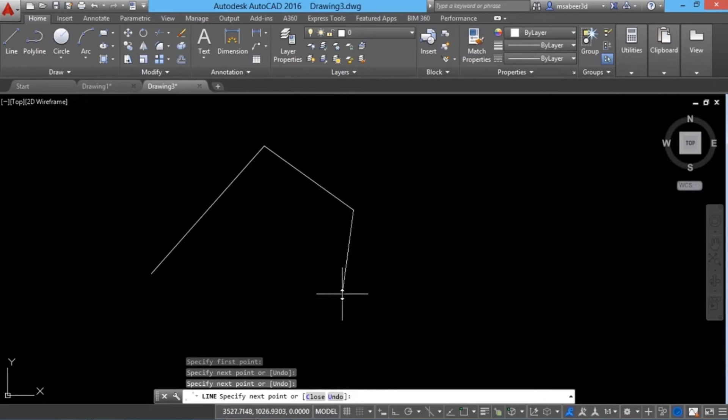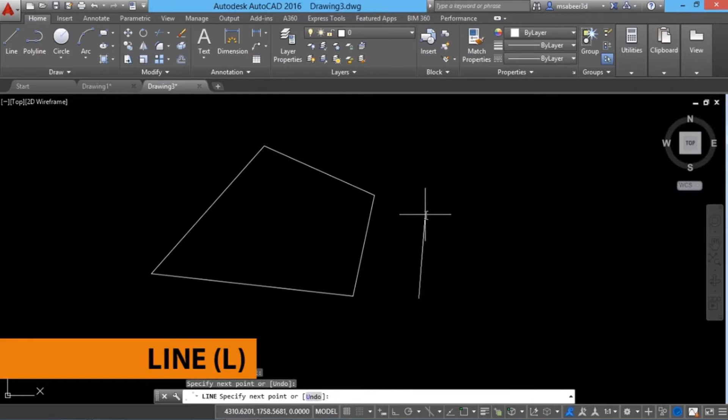These coordinate locations you can see in the status bar. Now I'll just pick some random points to define the next segments. I can undo the previous segment if I want using the undo option in the line command. Now I'll click to define a few more points, and I'll click on close to go out of the line command. Now I have got an irregular polygon. Alternatively, you can also create lines by typing the letter L using the keyboard. Now you will get the same prompt sequence. And I'll just give enter to go out of the line command.

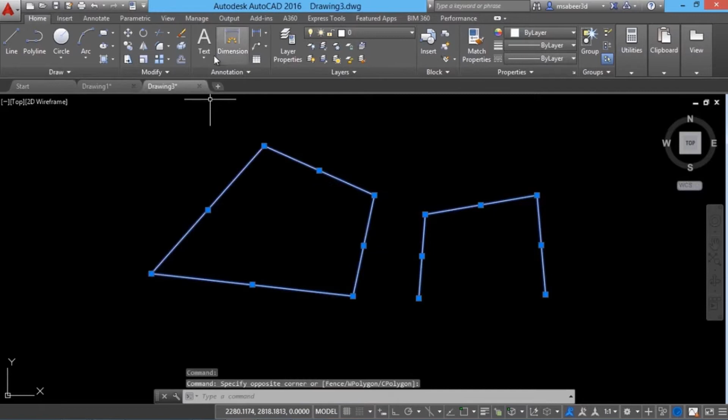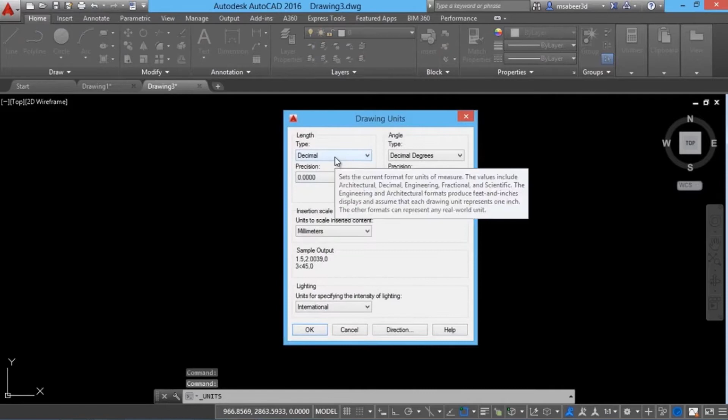are given in centimeters. So I'll go back to my file, click on the application button, drawing utilities, and I'll go to the units command and I'll set the linear measurement to decimal, precision to 2 places, and I'll change the insertion scale to centimeters and I'll give OK. Now I should set my limits. So I'll give the limits command. At the lower left, I'll give 0, 0 because there are no negative values in this figure. Now I should set the upper right corner. Since the maximum dimension to be plotted is 1200, I should give upper right a value which is above 1200. So let's give it as 1500, 1500.

Now I should give a zoom all to bring the limits to the screen. I'll give zoom and all. Next I'll go to the line command. When I'm asked to specify the start point, I'll give 0, 0 because I want the line to start exactly from the origin point. Such a method of point entry is called the absolute coordinate method, in which you define a point precisely using its X and Y coordinate. I'll just hold down the scroll button of the mouse and I'll simply drag it upward to pan the display. Now you can see that point clearly.

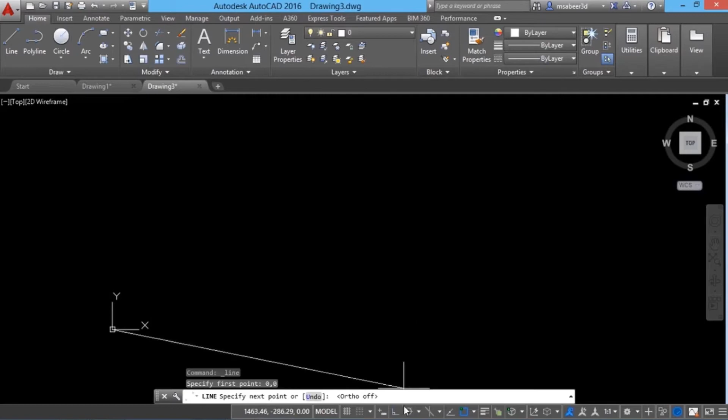Next, I want to draw a line 1200 units rightward. For that, I'll activate the ortho mode. In AutoCAD, when the ortho mode is on, the cursor moves only in the horizontal and in the vertical direction, and its free movement is restricted. But once you turn it off, you can see that it can move freely. Ortho mode can also be activated by pressing the F8 function key. Now I'll give the value 1200. Now AutoCAD has drawn a line in the direction of the cursor through the distance of 1200 units.

Next, I'll draw another vertical line in the upward direction through a distance of 300 units. So I'll keep my cursor in the upward direction. Since the ortho mode is on, it will move only in the vertical direction. Then I'll type the distance 300. Now this line has got a length of 300 units. Now I'll just give enter to go out of the line command.

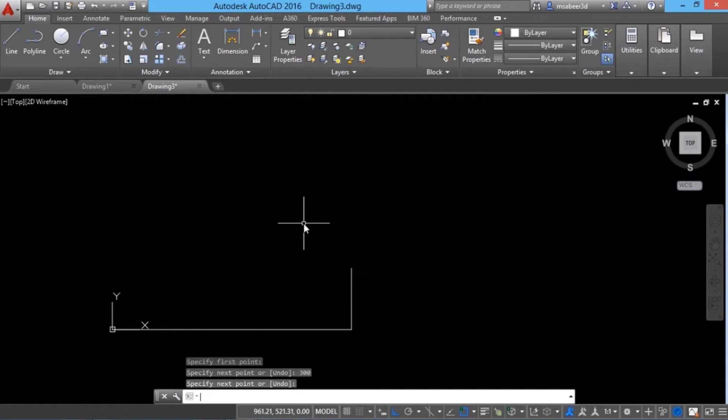Next, I'll activate this button in the status bar. It is called dynamic input. Now I want to repeat the line command. So just right click and click on repeat line, and you can start from this endpoint.

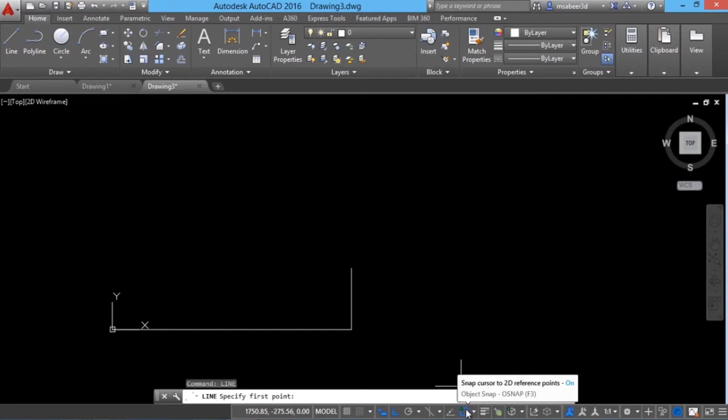When I take my cursor onto this endpoint, you will get a tooltip that it is an endpoint. That's because we have an OSNAP button in the status bar which is on. We will talk more about OSNAP in the coming videos, and I'll just make a click. Now I'll disable the ortho and the cursor can move freely in all directions.

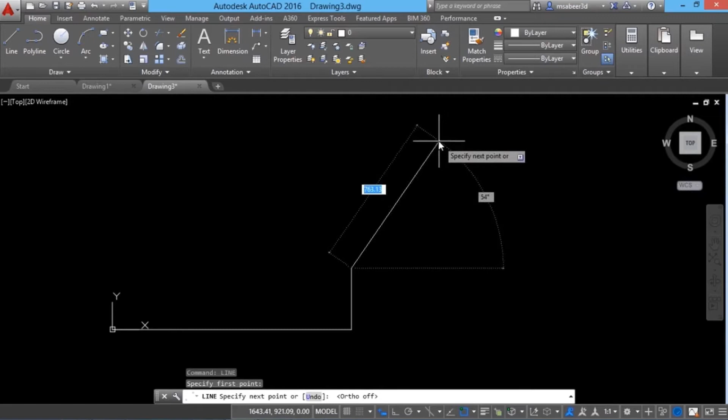But now you will see two values getting dynamically changed. The length of the line is getting updated and the inclination of this line segment with the horizontal or with the x-axis is getting updated. I want to draw the next line segment which is at 1200 units. So I'll type the value 1200. I want that line to be drawn in the leftward direction and I want to control the angle. So I'll just hit the tab key.

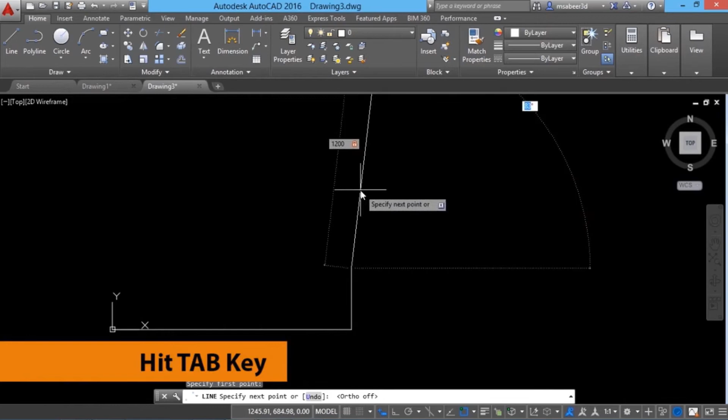Now you can edit the angle. Now you can see that the angle is changing from 0 to 90 when it is vertical to 180 when it is leftward. Since I want to move in the leftward direction, I can give an angle of 180 degrees. Now this line has got a length of 1200 units and it is drawn in the leftward direction. The next segment has got a length of 300 units and it is drawn straight down. So the angle is 90 degrees.

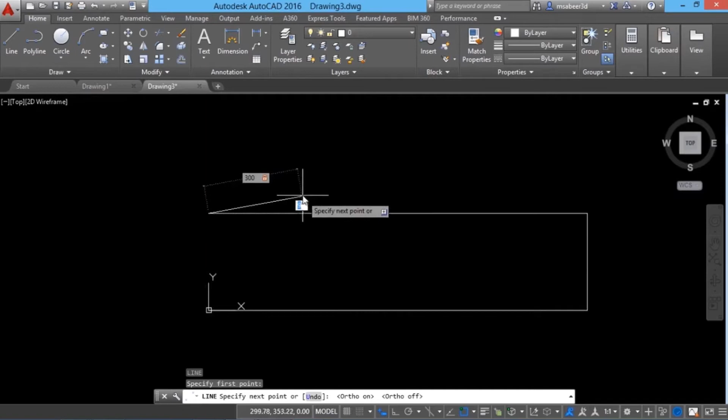Since the ortho is not on, along with the distance, you should also specify the angle. So I'll give the distance 300 and I press the tab key to edit the angular value and I'll give the angle as 90 degrees. You can see that the angle starts from 0 and it increases to 90 if it is vertical, and when it is leftward it is 180. And in the clockwise direction it starts from 0, and when it is down below it is 90, and when it is leftward it's 180. So you should give an angular value of 90 degrees.

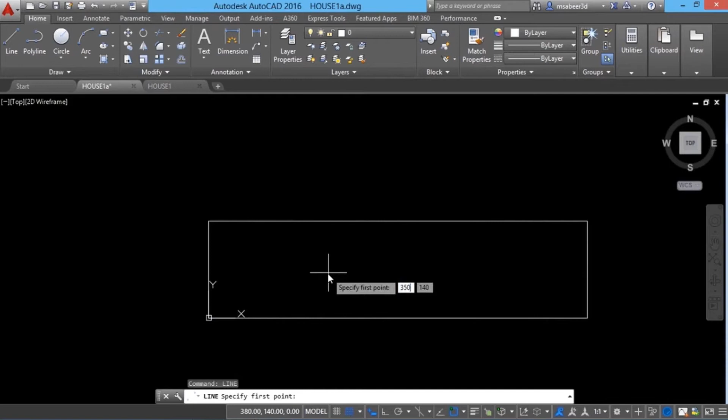Next we should draw a vertical line at a distance of 350 units from this origin point. So I'll right click and repeat line. When I'm asked to give the first point, I'll give 350, 0. I can give that value in absolute coordinates. So I'll give 350. You can either give comma or you can press tab. Then I'll give 0. So I've started exactly from that point.

It should be a vertical line. So I can turn on the ortho mode by pressing the F8 function key. Then I'll type 300. Now just give an enter to go out of the line command. So that line is made.

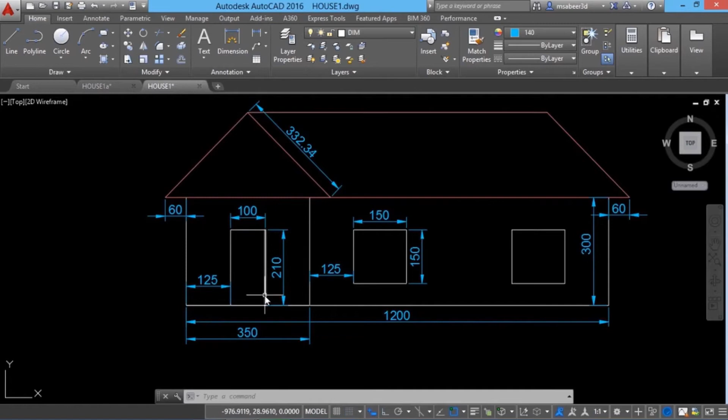Next we will create the outline of the door. And I should start from this particular endpoint. And it is given that this point is at a distance of 125 units from the origin. So I can start from that point. Then I'll go straight up 210 units. Then 100 units rightward and 210 units downward. So let's do that. I'll right click, repeat line.

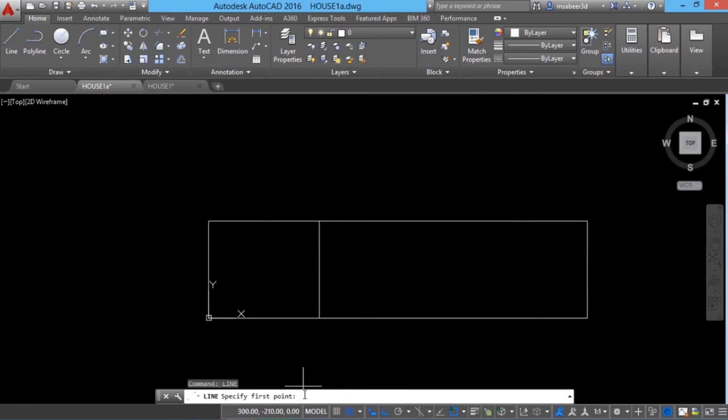When I'm asked to give the first point, I'll give 125, 0 in absolute coordinates. I have started from that point. You don't need a dynamic input for the time being. So I'll just disable it. I can straight away give the values. And the height is 210. And rightward I should move 100 units. And downward again 210. So I've completed it.

Next I'll create the outline of this window. If I want to start from this point, I should find out the coordinate of this point. And this point is at the same height as that of the door. So the y coordinate is 210 and the x coordinate is 350 plus 125, which is 475. So if you give 475, 210, you can locate this point. Then you can go 150 rightward, 150 downward, again 150 leftward, and you can close it.

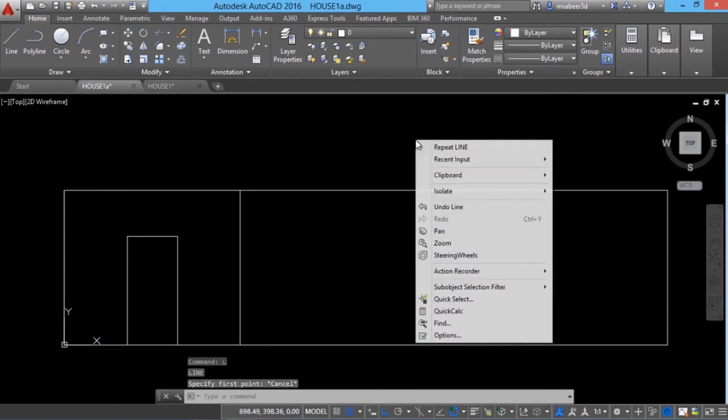I'll right click, repeat line. At the first point prompt, I'll give 475, 210. Rightward 150, downward 150, leftward 150, and I'll close it.

Next, I'll create the outline of this window. These two windows are having the same dimensions, but I should locate this point to start with. You know that this distance is 125, so this point will have the x coordinate equal to 1200 minus 125, which is 1075. So the coordinate of this point is 1075, 210, then 150, 150, 150, close. Right click, repeat line, 1075, 210.

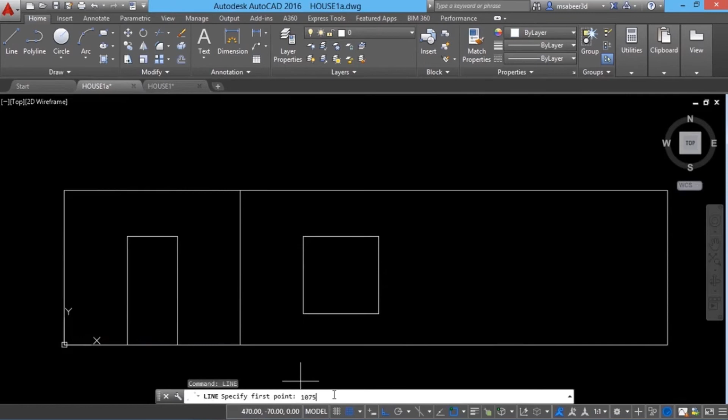Started from that point, now 150 down, 150 leftward, 150 upward, and you can click on close to close it. Now you should make sure that your ortho mode is on, so that it is easy for you to move in the horizontal as well as in the vertical directions.

Next, I'll create the outline of this roof. For that, I'll start from this endpoint. To locate this point, you can either directly go and take the endpoint, or give coordinates. Since the origin is here, the x coordinate of this point is 0 and the y coordinate is 300, which is this height. So I'll start from 0, 300.

Then I should draw an inclined line at 45 degrees with respect to horizontal, in the counterclockwise direction, and the length of this line is 332.34, which is given here. It is also inclined at 45 degrees, but in the clockwise direction. Once you reach here, you can close to complete this triangle.

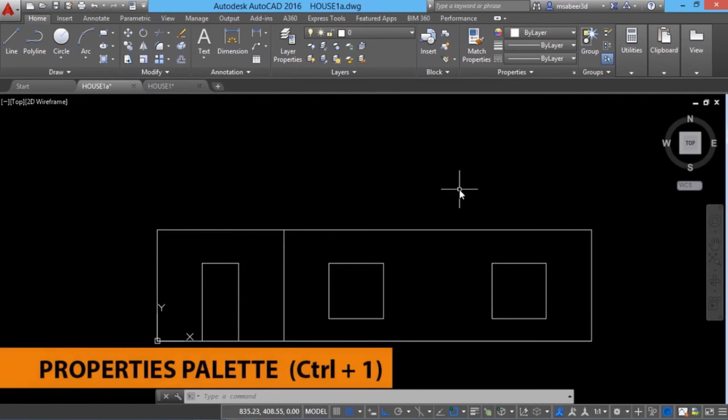Before I draw lines, I'll change the color. For that, I can use the Properties palette. You can access the Properties palette from the View menu, just click on Properties to get it, or you can activate the palette from the Quick Access toolbar.

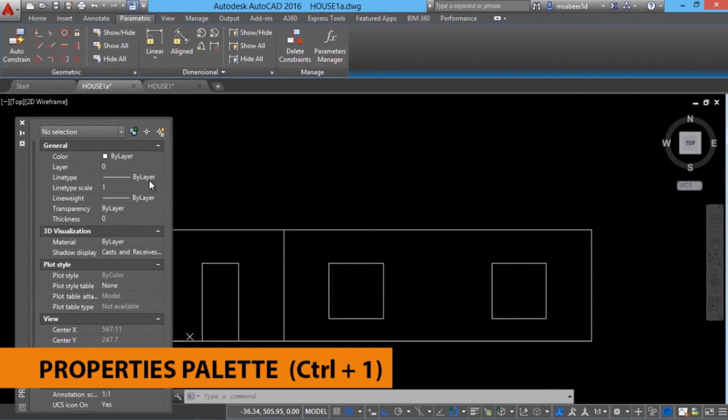Since Properties is already active here, I can directly go and take Properties from here, or you have a shortcut which is Ctrl+1, and this is the preferred method to get the Properties palette. This palette will let you change properties related with objects such as color, line type, line weight, etc. We'll talk more about properties in another video.

Now I'll change my color to a different color, so I'll click here to get the color pop-up, click on Select Color, and choose this particular color. This color has got a color number of 21, you can see it there. Just give OK and close the palette.

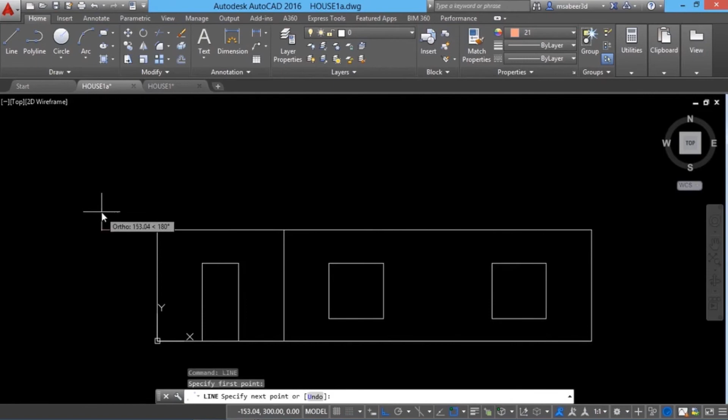I'll right click, repeat line, and directly go and take this endpoint. Since the OSnap button is on here, I'll make a click here, keep the cursor in the leftward direction, and give the value 60. Now I'll activate the dynamic input, and give 332.34 as the distance, press tab, and give 45 degree as the angle. Now I've got the line drawn.

I'll keep the cursor in this direction, and type 332.34 as the distance. I'll press tab and 45 degree as the angle, and enter. So this line is drawn. Now I can just give a close to complete this triangle.

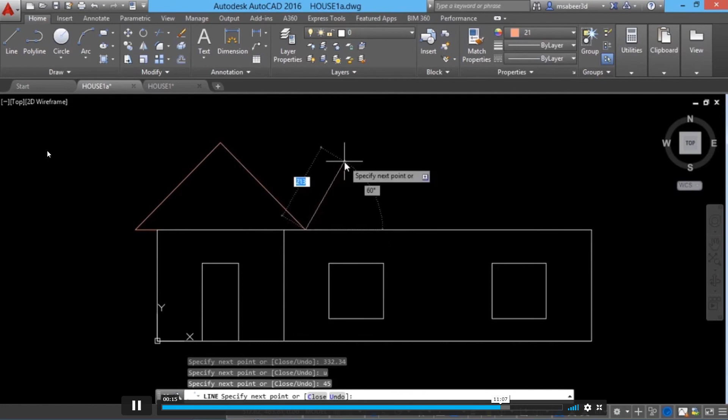Next I'll draw a line from this endpoint 60 in this direction, and draw another line with 332.34 as the distance, then connect with this endpoint. So right click line, I'll start from this point.

So I can turn off the dynamic input, and activate the ortho. I'll keep the cursor in this direction and type 60. It is moving in the horizontal and vertical directions, so I must turn off the ortho mode.

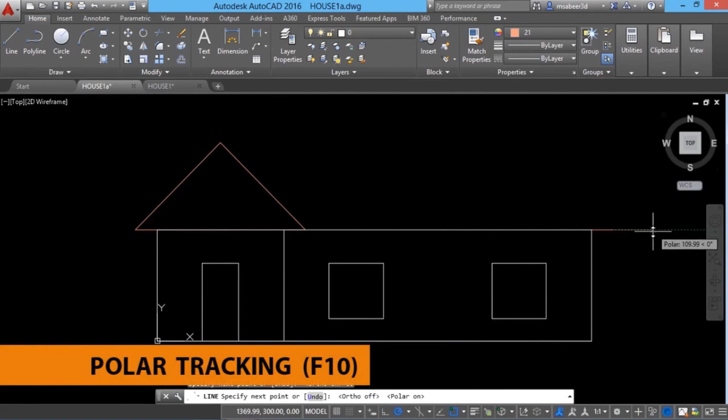Now I want to draw an inclined line at 45 degrees. For that, I'll activate another mode in the AutoCAD status bar, called polar tracking. Once you activate polar tracking, your cursor snaps at regular angular increments, or the cursor stops temporarily at predefined angular increments. Where do you define these angular increments?

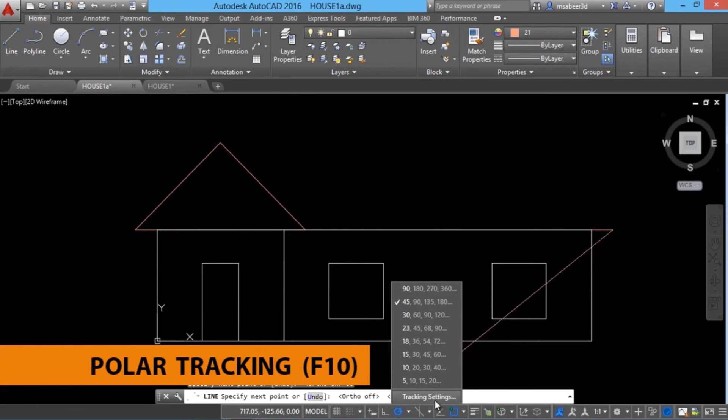Just click on the small arrow at the polar tracking button, and you can see the predefined angular incremental settings. You have 90, 180, 270, just like ortho, and 45, 90, 135, or 30, 60, 90. Likewise, you have various predefined increments, but if you want, you can set your own increments. We'll see that later. So this is my required increment, 45, 90.

So I'll keep the cursor at an angle of 45 degrees. Now you can directly type the distance, which is 332.34. Now I can connect with this endpoint. I should draw another line like this.

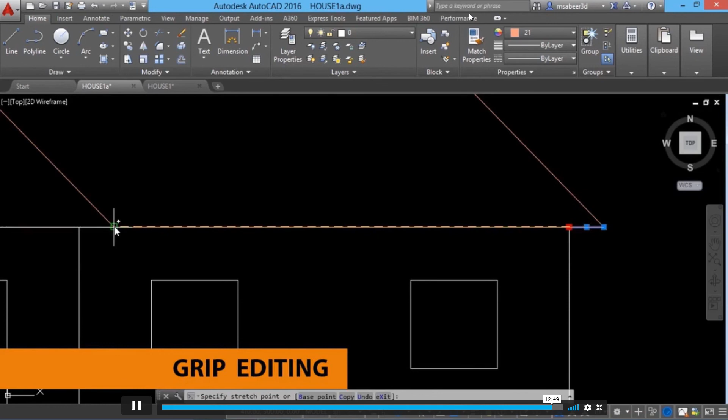For that, you can just click on this line. You will get certain points, called grip points or grips. You can take the cursor onto any of those grips, and make a click to activate that grip. Now that grip is set to be a hot grip. Now you move the cursor and connect it with this endpoint. Now I have stretched that line based on that grip point.

We'll have another video on grips wherein we will cover this concept exclusively. So we have covered almost all methods to draw lines in AutoCAD. The fully dimensioned figure is given along with this video. Please download this figure and make a try.